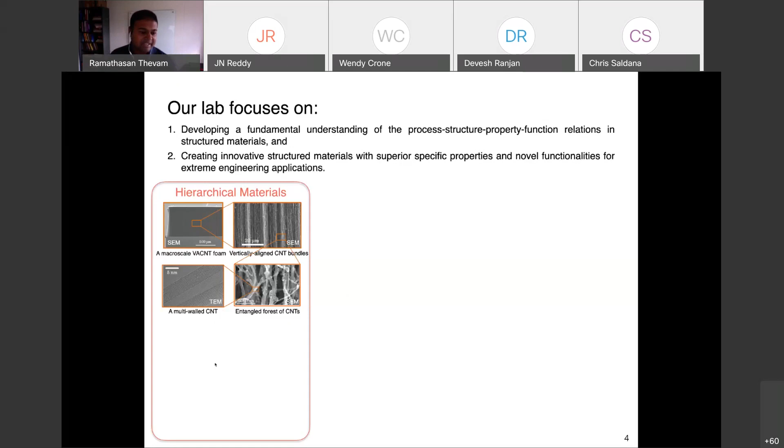Across these length scales from nanometers to macroscale, you can tune these structural features to affect the bulk properties. That's what we do in our lab, and the outcome of that is, for example, you can see in this video: if you take this material and shoot it against a target attached to a striker, it goes and deforms against the target in an orderly fashion, and it completely recovers back. During this process, it absorbs a lot of energy, in the order of more than 200 times the energy absorption of any commercial foams of similar density.

Another kind of material system we focus on is called non-Hermitian metamaterials, where these materials don't have apparent geometric symmetry, but they do have symmetries in the dynamic equations of motion, for example parity and time reversal symmetry. When these symmetries are broken, they can lead to unique bifurcations called exceptional points. Around these points, you can have extreme wave-matter interaction that we can utilize to create hypersensitive sensors and directional wave transport.

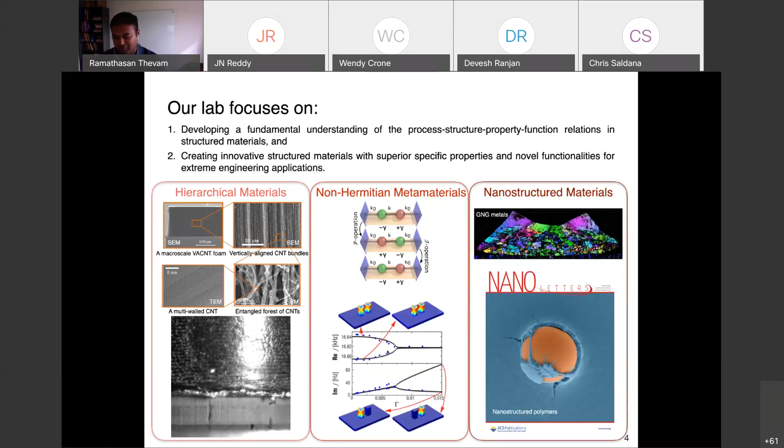The third class of system we study is nanostructured materials, which I will focus on in the talk today. So the first part, I will talk about piezoelectric polymer films. The concept of armor is an evolving concept - it depends on the threat we face in the current time. So this evolution of armors has always been accompanied by the development of novel advanced materials.

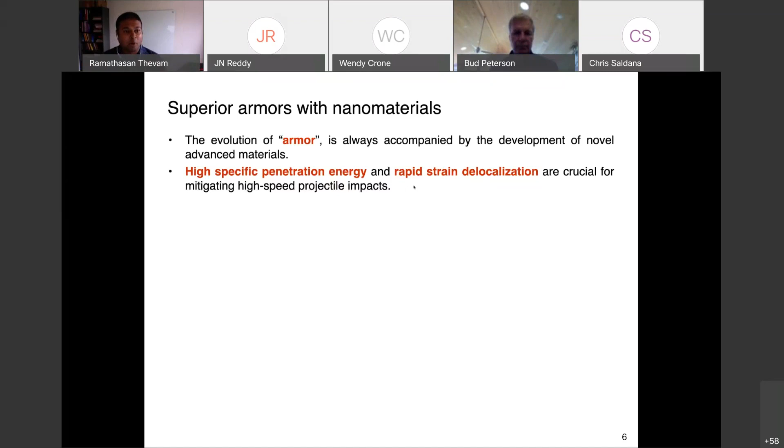In the nanomaterials regime, one of the very first studies done with this microballistic system was on graphenes. These multi-layer graphenes have been shot by microprojectiles, and it has been shown that they have superior penetration energy compared to other bulk protective materials such as Kevlar, PMMA, aluminum, steel, and also some other nanomaterials. This was the first promising result that launched us towards this nanomaterial regime, and of course we have now developed much better materials that I will show you shortly.

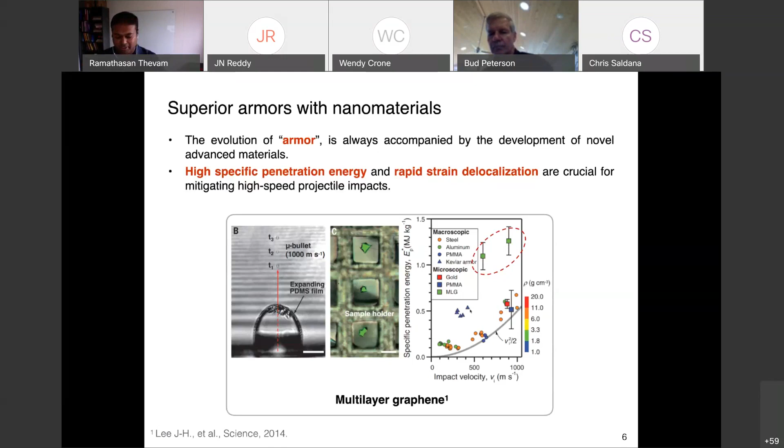This microballistic testing system performs ballistic testing at a miniaturized scale, where your projectile is a microprojectile. You have a target material deposited on a transmission electron microscope grid, and then you launch these microprojectiles selectively, one particle at a time, using lasers.

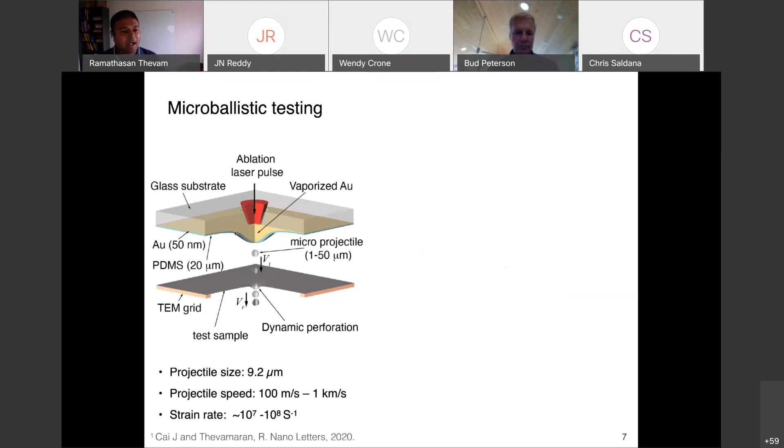The propulsion mechanism works by having a thin layer of gold on a microscope glass slide that absorbs the laser energy and becomes gold vapor. This is trapped between the PDMS rubber and the glass, such that the rubber expands and launches the projectile. This entire action happens inside the microscope, as you can see here.

While doing this, we have transverse imaging at ultra high rates, down to every 12.5 nanoseconds. We vary the projectile velocities from 100 meters per second to 1 kilometer per second, which gives a really good opportunity to study small scale materials in very high strain rate regimes.

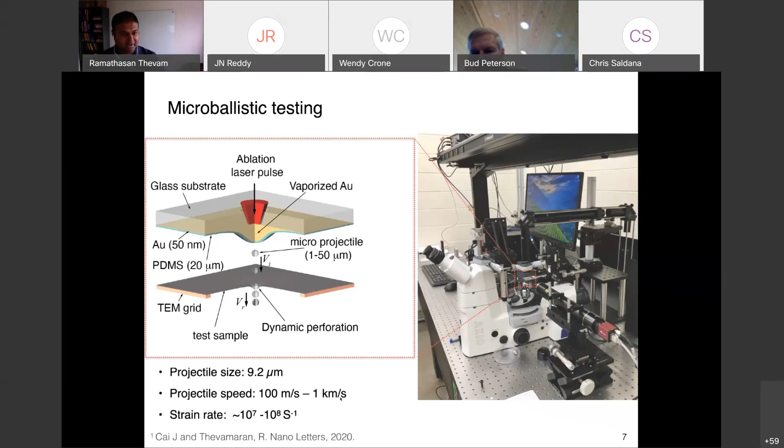Here you can see how a PDMS bubble expands to launch the projectile, and here you see a projectile penetrating a target. Post-impact, you can take the target and look at it in the microscope, where you can study the deformation holistically, looking at the entire deformation region as well as the micro and nanoscale details.

The material system we picked to study is a piezoelectric semicrystalline polymer called PVDF-TrFE. This material is rubbery at room temperature, and we did two types of processing on it.

One was reducing the thickness of the material. As you reduce thickness down to the nanoscale, the crystallinity and crystal size of the material go down because of the geometric confinement effect. In addition, we did thermal annealing above the Curie temperature, which brings back the beta phases that provide the piezoelectricity, and tends to increase the crystallinity, as you can see when you do the thermal annealing.

If you take this material and shoot microprojectiles at it at high velocity, about 1 kilometer per second impacts, the dotted line shows the projectile diameter. As you go from the annealed film to the thin film, you have decreasing crystallinity, and the strain is much more localized in the annealed film, while the deformation gets more and more delocalized as you go to thinner film.

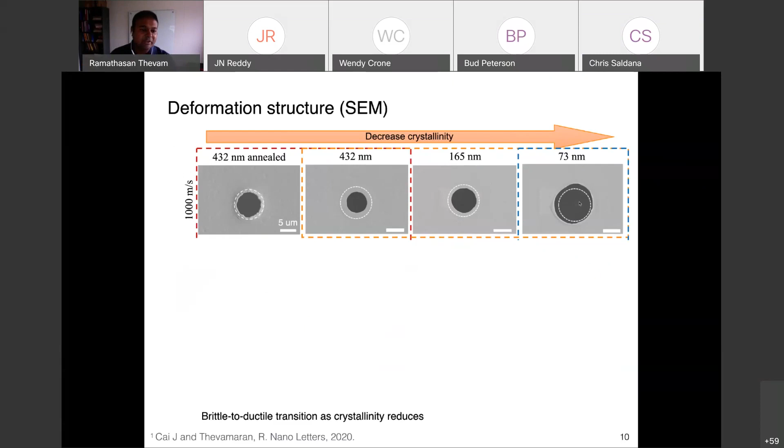As you reduce the velocity of the impact, the annealed material shows more brittle deformation. If you zoom in, you can see fibrillated crazes formed, which is characteristic of brittle deformation. But as you confine the geometry and go to nanoscale, that causes more plastic stretching and very large deformation delocalization.

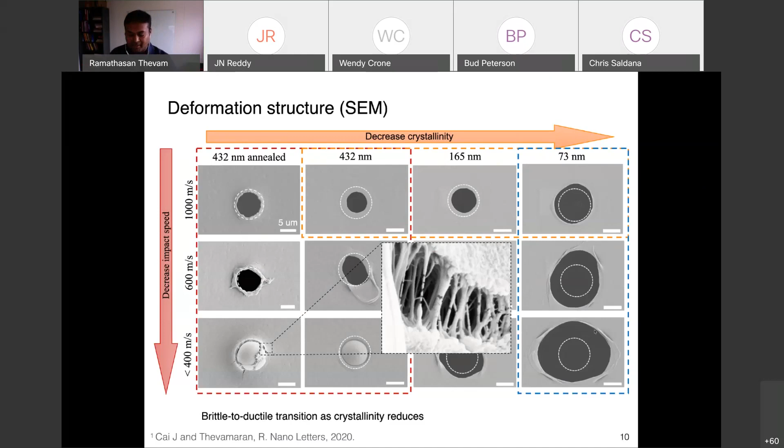So if you look at the specific penetration energy, you can immediately see that from an annealed, thicker film to the thin film, there is a very high increase in the energy absorption, or specific energy absorption.

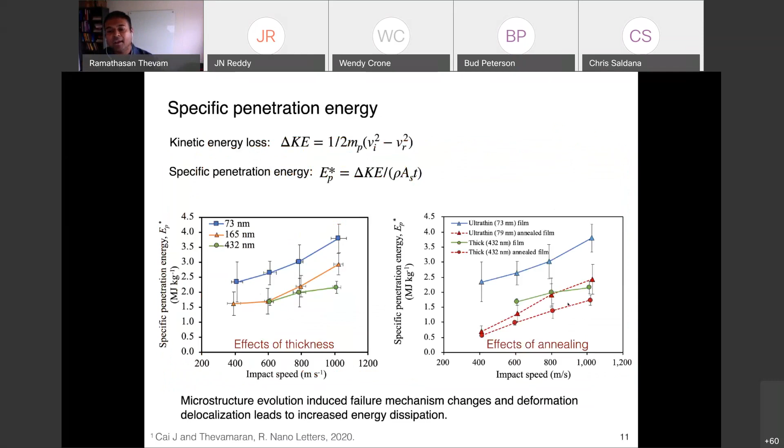If you compare to the crystallinity, increasing the crystallinity, regardless of the thickness, reduces the specific penetration energy. So why did this happen? As I said, it is the geometric confinement.

As you confine the thickness of the material, the crystalline domains have a hard time forming, so you have reduced crystallinity. Also, these crystalline domains will align more laterally in the transverse direction. In addition, the polymer chain lengths are now comparable to the thickness of the material, so the entanglement

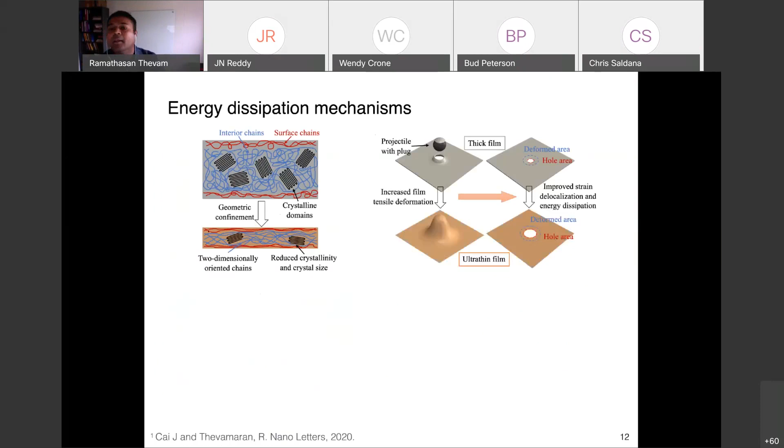morphology in the amorphous region also will change in the material. So if you shoot this is what happens: a thicker film shows more brittle behavior, while the thinner film stretches, undergoes large tensile deformation, and that leads to better energy dissipation.

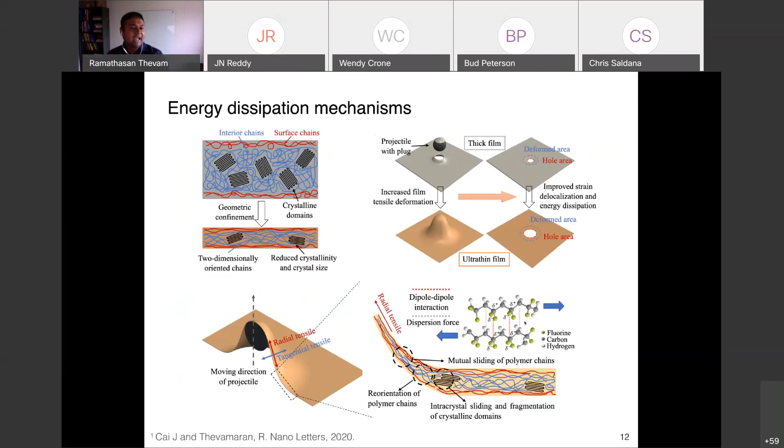As you're stretching the film biaxially by the projectile, the crystalline domains fragment, and the polymer chains get stretched and flow into the deformation region, causing more mutual sliding between the polymer chains that can also engage piezoelectric effects. All these together have led to this increased specific penetration energy.

So if you want to stop a 1 kilometer per second microprojectile, you would need about 10 layers of the thicker film versus about 19 layers of the thinner film. You can think of sequentially placing them to create an ambient armor at a standoff distance from the system you want to protect, and this system would allow you to reduce the weight by about 70% to achieve this very high specific penetration energy.

So what you have seen is a very high specific penetration energy due to polymer chain morphology changes as well as crystallinity changes, and it engages a lot of viscoelasticity and viscoplastic deformation as well as dipole interactions in the piezoelectric material.

With this understanding, we want to study more complex systems like nanofiber mats, both in polymers and in carbon nanotube type systems. We want to study the competition between the intrinsic and extrinsic mesoscale interaction effects in this material system. This is an ongoing study.

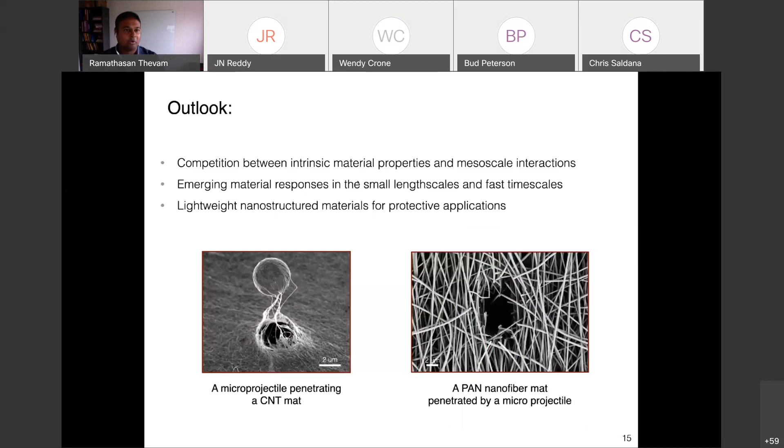The second topic I want to discuss is, instead of using this as a destructive technique as you've seen, we use it for creation. Instead of launching a rigid projectile towards a target you want to study, here you're launching a deformable projectile against a rigid target, so the projectile deforms against the target.

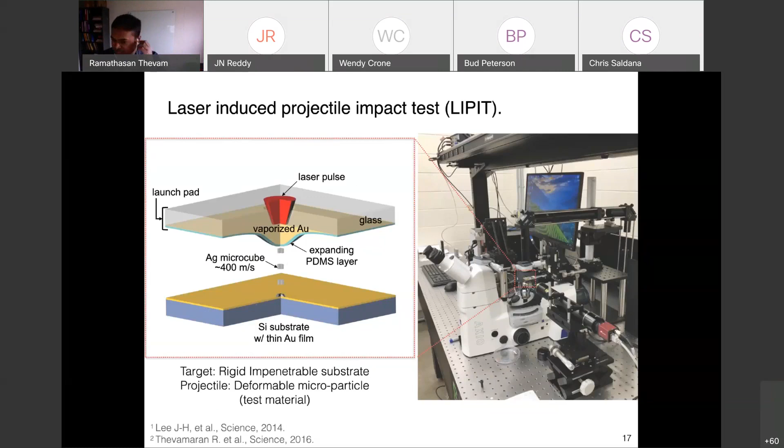So you create a structure within the projectile that we are interested in studying. Again, we use the exact same setup at Wisconsin to do these studies. This is something we have done to study a system called gradient nanograin metals.

Nanograins have been shown to increase the strength of metals, but they reduce the ductility dramatically, which can cause catastrophic failure of the material. So mixing the grains didn't improve the properties beneficially.

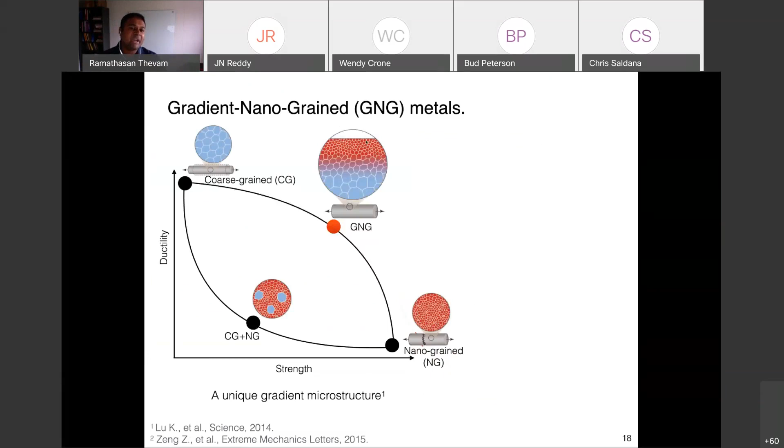But instead, if you create a spatial gradient in grain size, going from nanograins to larger grains, it can engage something called gradient plasticity, due to the grain sizes associated with the Hall-Petch relation, where the strain localizes differently in different grains. This leads to a progressive yielding situation where you can improve both strength and toughness of metals.

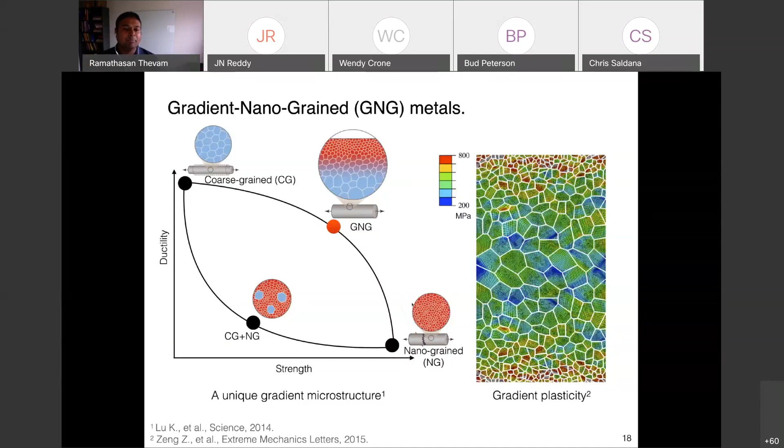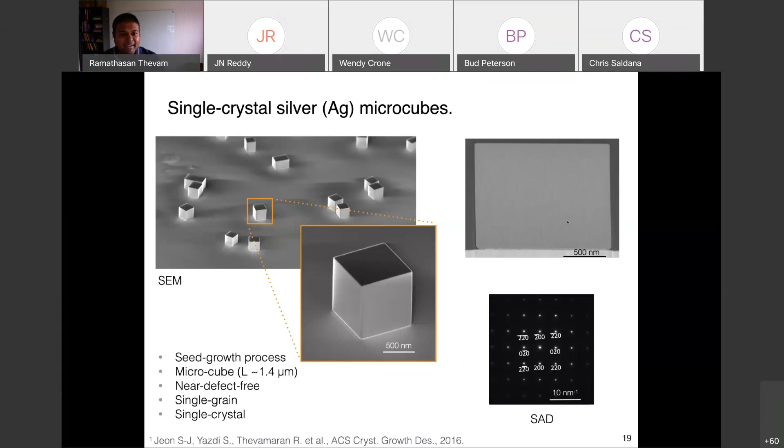This doesn't have dislocations initially, so you have to spontaneously nucleate dislocations to cause this massive strain burst in the system. So what would happen if you take these cubes and launch them against a substrate at very high velocities?

A velocity of 400 meters per second corresponds to a kinetic energy of the projectile of approximately 2.3 nanojoules. This is much, much lower than the melting energy of silver, so anything I show is a solid state process. You don't see melting, and the strain rates are very high, all the way up to 10 to the power 8 per second — very high strain rate deformation.

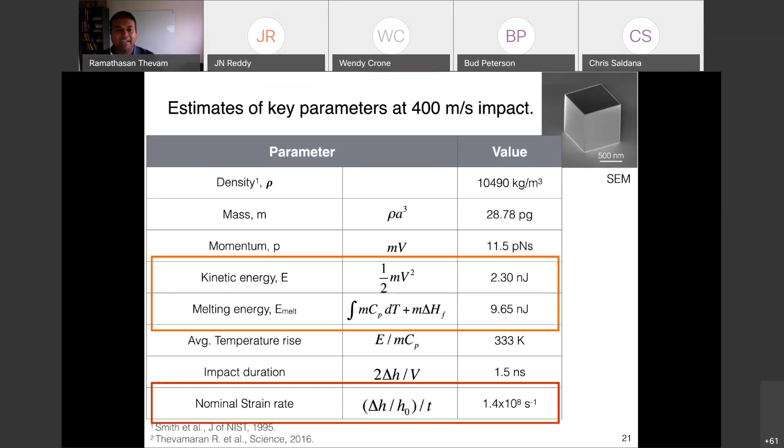This face-centered cubic material has 100, 110, and 111 symmetric directions. They correspond to this face, edge, and corner impact direction. So they create this slip system that exits the crystal, as you can see.

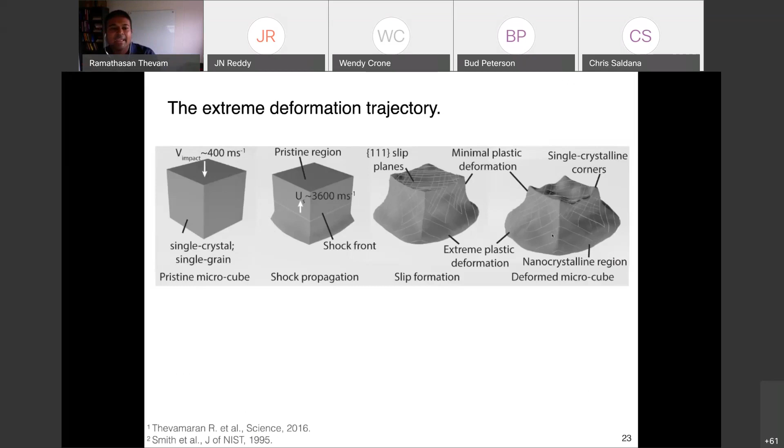If you take this cube, cut it, and look at it in the transmission electron microscope, we can study the nanostructural deformation that happened inside. What we think caused this deformation is that if you do a simple normal shock calculation, you will see that the pressure in the material goes all the way up to 10 gigapascals.

The yield strength of silver is only 60 megapascals, so this is a huge stress. That will take the material into a hydrodynamic stress state in the bottom region, which shapes the deformation of the material there.

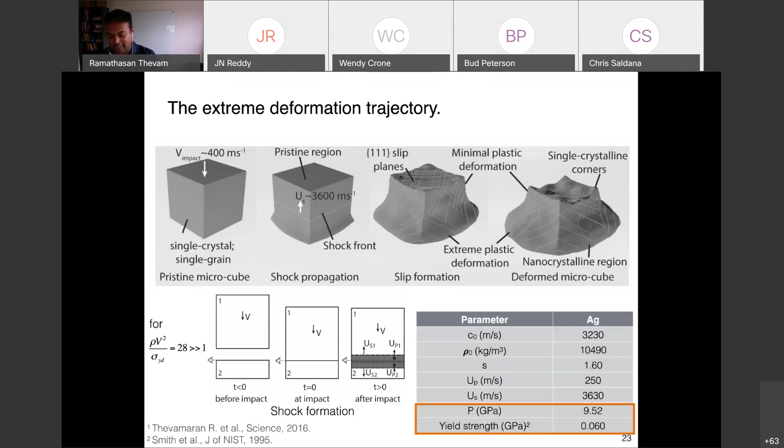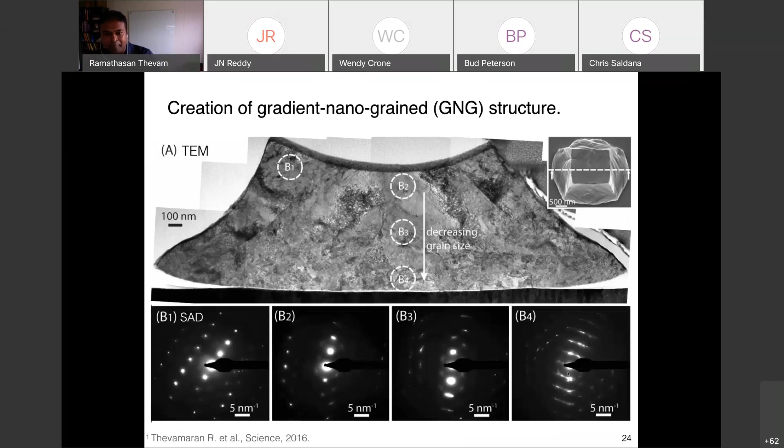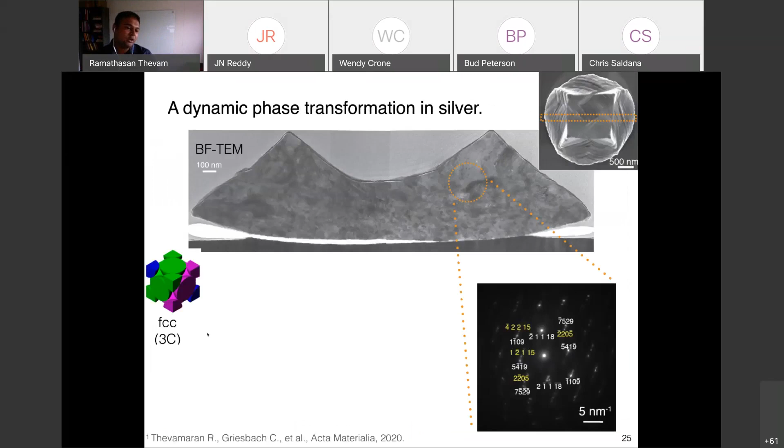If you go into more detail of this diffraction, the diffraction pattern turns out to not show this cubic symmetry anymore. Instead, the face-centered cubic silver is supposed to have this 111 plane in an ABC stacking order that repeats, which is called the 3 cubic stacking, or 3C.

But it goes into a hexagonally close-packed system instead. So there has been a martensitic phase transformation that happened in silver, taking this face-centered cubic system into a hexagonally close-packed system that has an ABCB stacking order that repeats itself.

To confirm further, we studied hundreds of selective area diffraction images and compared them against standard diffractions, and it indeed confirms that there had been a martensitic phase transformation.

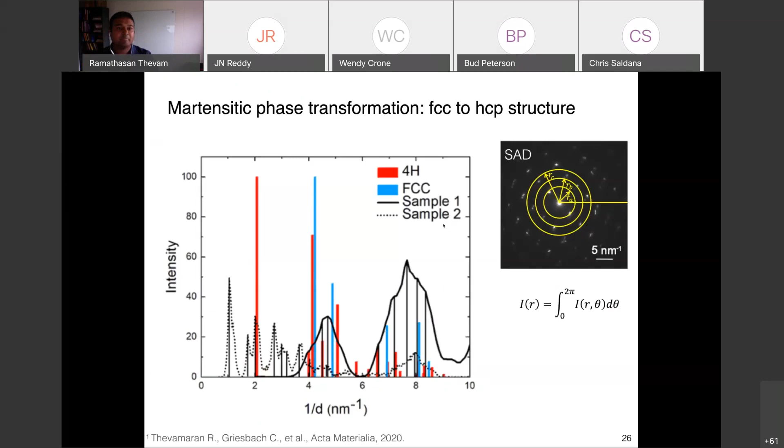Of course, we are not the first people to discover that silver has an HCP system. It was discovered in Russia in the late 1970s or 1980s in Siberian gold-silver mines, where they noticed this hexagonal silver. It has also been observed in India, forming due to high pressure magnetron sputtering, and this has also later been seen occurring in nanowires.

All these are slow kinetic processes that cause this phase transformation, whereas ours is the first evidence of a martensitic phase transformation due to a physical process of impact.

Whereas if you look at the edge impact of the cube, it does not show this phase transformation, and it tends to stay more or less single crystalline throughout the material system.

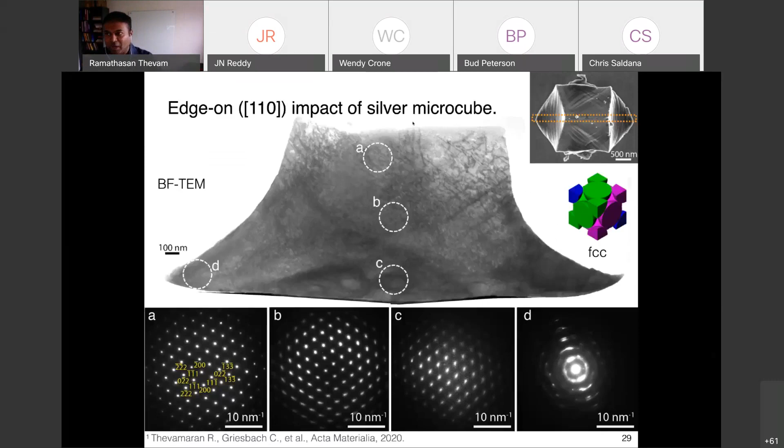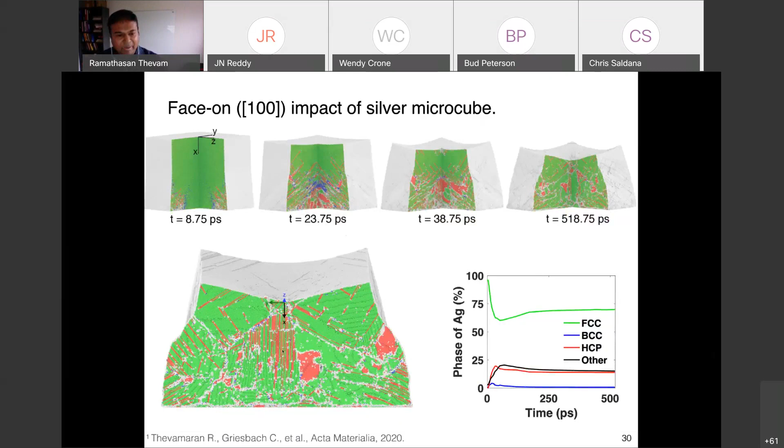To understand this further, we collaborated with Mauricio Ponga from British Columbia to do molecular dynamic simulations, which showed us the stacking faults that have been created emerge here, and then form these large hexagonal close-packed regions. Whereas this does not happen in the 110 direction of impact.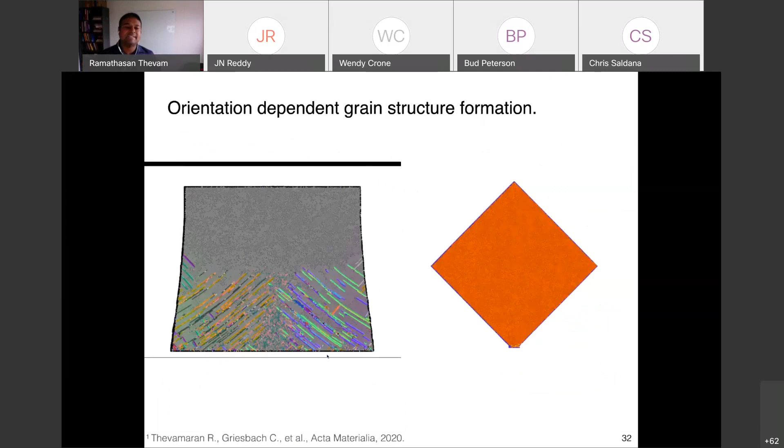If you look at the molecular dynamic simulation, it also shows that when you impact on the face, it causes this gradient nanograin structure, whereas the corner impact or the edge impact does not cause the favorable gradient nanograin structure in the system.

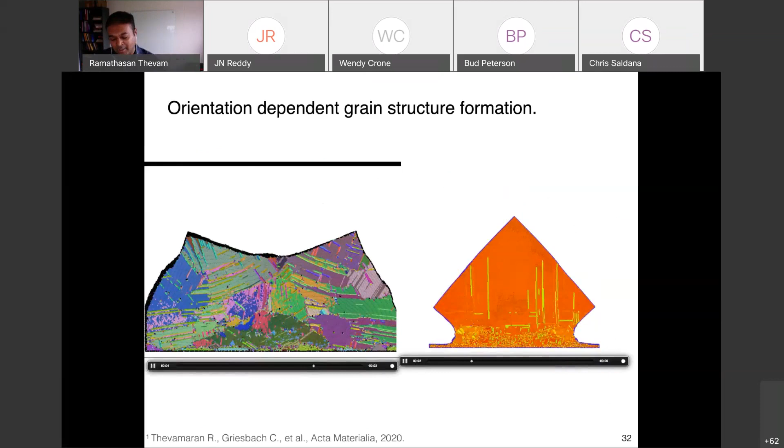So the key findings are that we do see the intrinsic and extrinsic particle shape as well as the crystal symmetries playing a role in the deformation, as well as we do see the role of two hydrodynamic and crystallographic stress states playing a role.

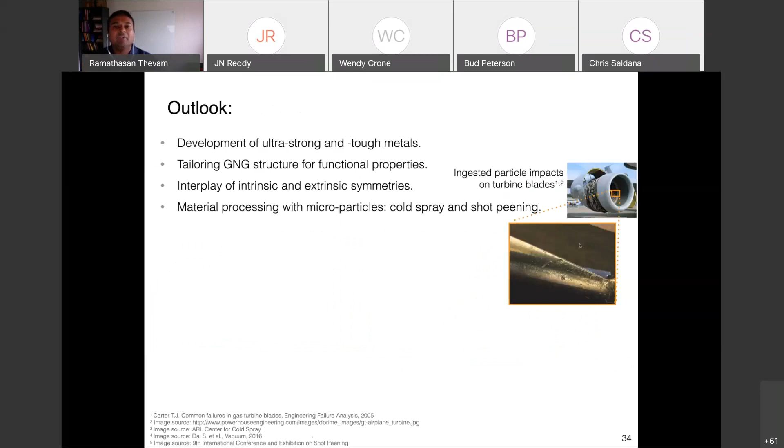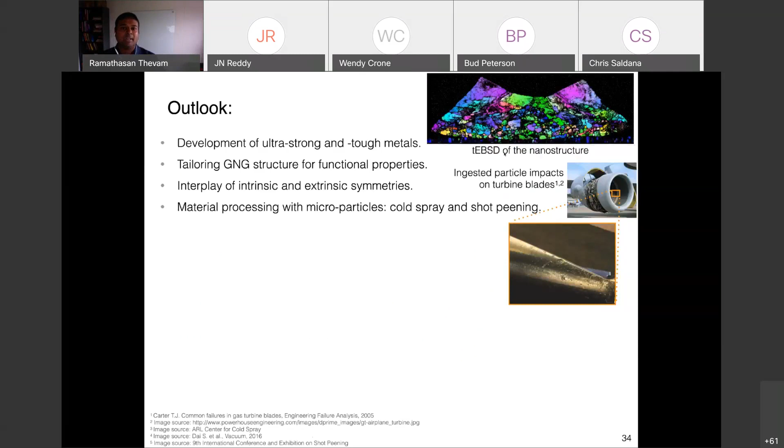So what we want to do with this is currently, with the aim of creating ultra strong and tough material for extreme application, we study the structure property relation in the material. We characterize the structure through the transmission electron backscattering and then connect them to the nano indentation properties of the material. And also this can be looked at in a material processing fashion, where you can launch these microparticles to harden a surface or else create coating.

So any understanding we develop in single particle impact in our laboratory system will allow us to improve this material processing system as well.

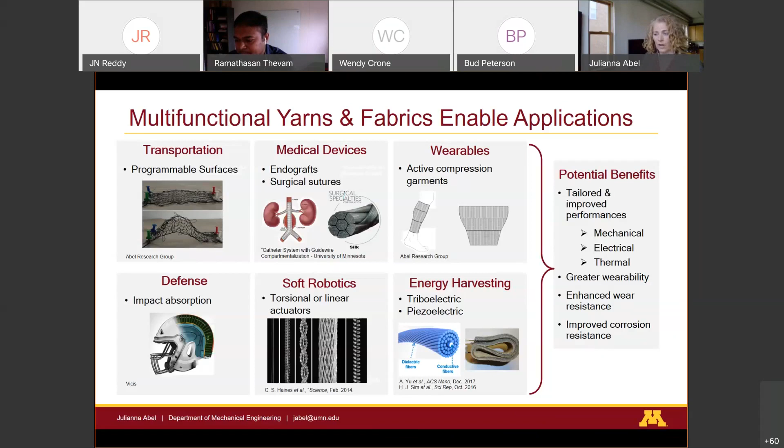We want to increase wear resistance because that's important for use, and improve corrosion resistance. And so in my lab, we look at all of these factors. My lab is the Design of Active Materials and Structures lab, and our goal is to combine innovative design processes and advanced manufacturing techniques with material and structural modeling to lay the scientific foundation necessary for the rigorous design of multifunctional fabrics.

And so we have several different projects that we're working on now, and I'm only going to highlight a few of them today. So I'm going to talk about understanding the multiscale mechanics of these structures. We're going to hear a little bit more about multiscale structures in this talk, and we're going to move on in those key takeaways and findings from these studies and how we can use them.

to implement and create new wearable technologies. And then we're looking towards new materials and manufacturing methods to move into textiles that look more realistic. And so we're looking at the manufacturing of microfibers, yarns, and textiles that have design performance.

And finally, if I have time, I'm going to share two other applications where, because of the multiscale mechanics we're developing and the design techniques, we're enabling some new applications like non-pneumatic tires and some innovative costumes. So I'm excited to share all this work with you today.

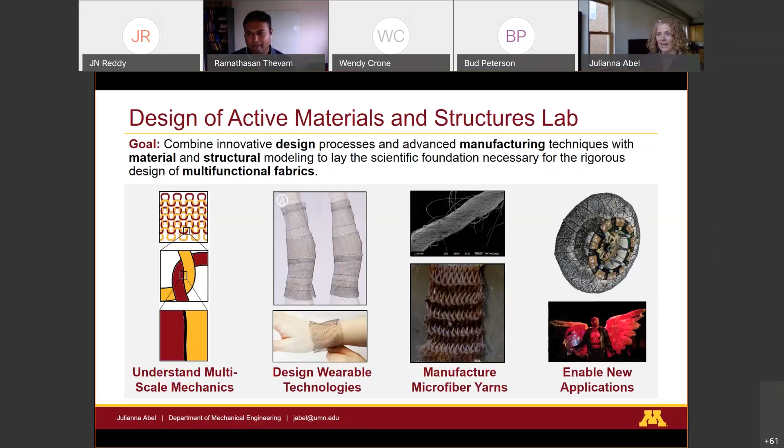But before we can dive in, we need to understand that we're mainly going to be working with the shape memory alloy system today. We work with some other materials within our lab, but this is the only one I'm going to talk about today. In order to understand how these systems work, we have to understand how the material itself works.

Many of you are probably familiar with shape memory alloys, and the most common effect is the superelastic effect. That's what's been implemented in countless implantable medical devices, where above a transition temperature you exhibit a constant stress plateau. You're linear elastic for a portion of time under loading, then you undergo this constant stress plateau, and you can recover all that deformation upon unloading. With these materials you can witness up to 8% recoverable strain, all at their high temperature above the austenite finish temperature.

Another common effect that's been used frequently is the shape memory effect. That's when you're actually changing the temperature, so instead of just dealing in stress-strain space, now you're dealing with stress, strain, and temperature. You go from a cold, flexible, martensitic state, and as you heat it up, you recover those deformations in the wire, and you can do mechanical work during this process.

There are a couple other factors and effects of shape memory alloys that we'll be on the edge of using throughout this talk. We have recovery stress generation, which is when we take a material, stretch it to a certain length, hold it there, then change its temperature and generate stress within the material, changing its stiffness. We can also exploit the two-way shape memory effect, where we have two memorized shapes that we move between through thermal transition. We're going to focus on the shape memory effect for most of the talk, with one application toward the end that involves superelasticity.

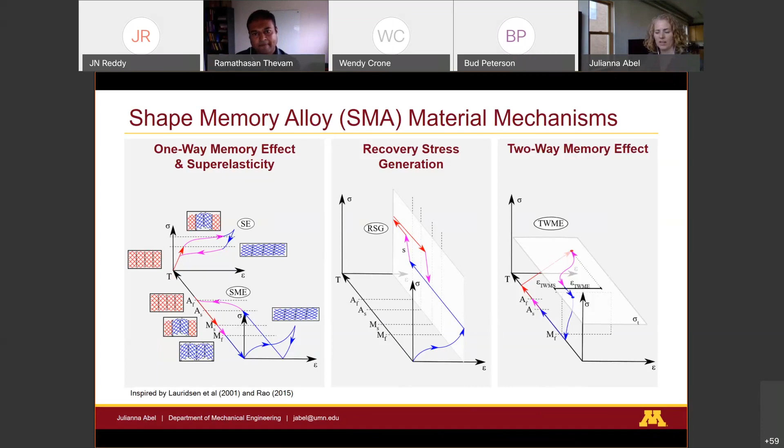Whereas woven structures are much more stiff and rigid. You have multiple fibers in parallel tows or triaxial tows, and so you get a very rigid structure.

I really like how this was shown in an article from the Jaeger group, comparing the performance of a single fiber. Regardless of what base material you're using, you have some initial fiber performance, and as you stretch the material, you'll see whatever performance is given. Once you integrate it into woven structures, you have these slight bends induced, and as you pull on it, it's a little stretchier than the base material itself. As you integrate it into a knitted structure, you have large bending deformation, so you get a much more flexible structure, and you get this J-shaped curve.

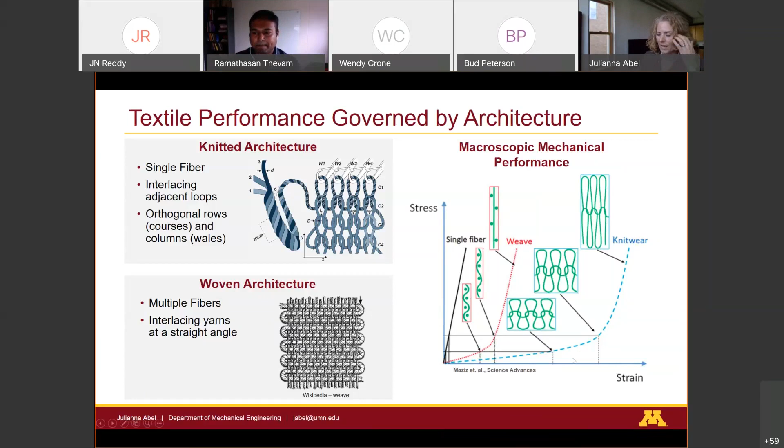This J-shaped curve is interesting for a lot of reasons. We like it because it's really close to human tissue, so you're getting a mechanical response that's getting closer and closer to what your human body exhibits, making it easier to create applications that match your body's performance.

Combining these two things together, when we have knits and weaves, we have this hierarchy of performance. At the first level, we have these bent loops, and when we make it out of shape memory alloy wire, we have this initial structure. We heat it up and get large contractions over a surface. We go up to the next level, and we can tailor our pattern.

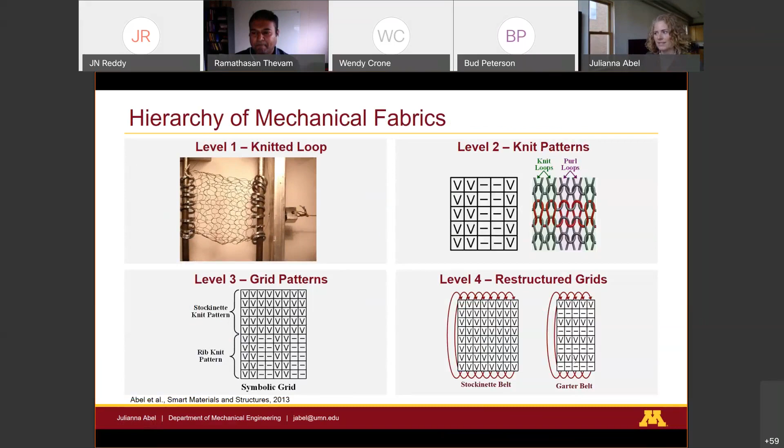So we can have knit and purl loops in certain patterns. This happens to be a rib pattern of varied columns. It's the edge of all your sweaters. And when you heat it up, it goes from a flat surface into this corrugated wavy surface.

So you can imagine using this for some type of flow control over a surface. The next level is creating heterogeneous patterns across the surface, so we have grid patterns. This is half rib and half stockinette. So the rib portion accordions in one direction, and then sequentially the stockinette comes over and folds, giving us sequential actuation with spatially distributed motions in different areas.

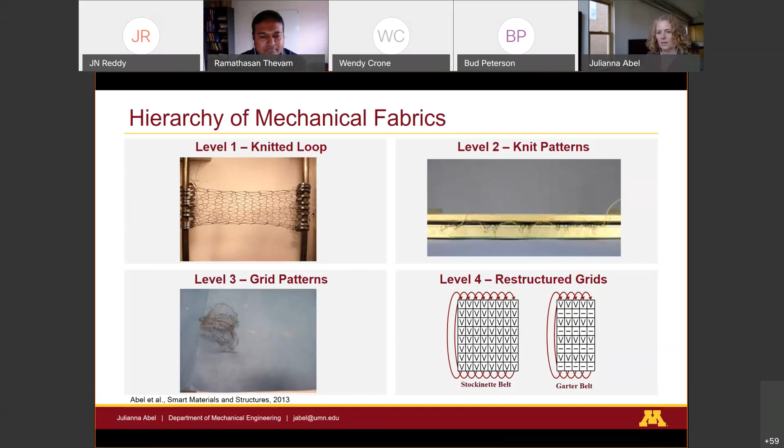And then we can create structures. We can enhance our forces or displacements by going from a 2D element into a 3D structure. This is a tube that acts as a deployable boom to produce 400% actuation strain under more than 5 times its weight. So we have a lot of potential at each of these levels to tune behavior for different applications.

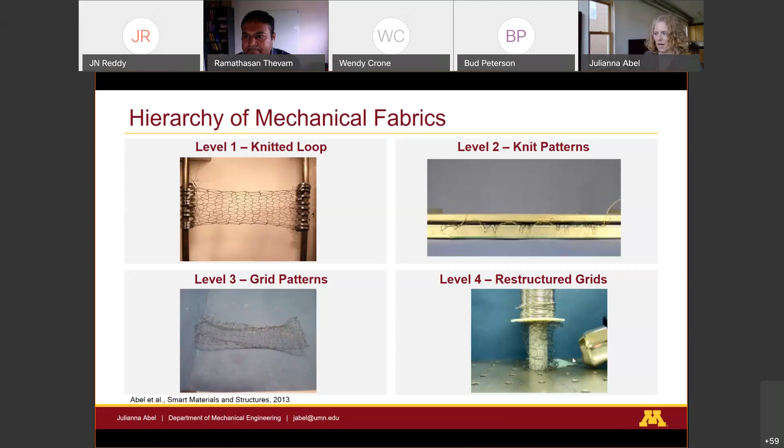This was really based off of one of the papers from my grad work, and we're going to be moving off in a whole bunch of different directions to better understand this phenomena and implement it in different systems.

So first, I want to talk about multiscale mechanics of knitted shape memory alloy actuators. This is work primarily done by my graduate student who graduated this summer, Kevin Eschen. He got his PhD this summer.

And then I'm just going to hint at one thing we did with Javier Garcia Barriocanal at UMN CharFac Center. There's so much work here, and I'm only going to show you the things necessary for you to understand throughout the rest of the presentation. I'd be happy to discuss any of these topics with you, though.

So why do we even care about the multi-scale mechanics of these structures? It's because at each scale, we have effects that determine the whole performance of the system. At the microscale, we don't know how our microscale behavior affects our design performance. At the mesoscale, we have these different loop structures and geometries that we're not sure how they impact performance. And then we have a macro scale. So how do we combine all these things together to create usable design tools?

So we're going to start up here at the macro scale because it is the easiest to conceptualize. Knitted structures are interlacing loops of adjacent unit cells, pulled through one another on a knitting machine that you see on your right. Depending on how far apart those needles are spaced and how far they pull them back, you get different loop sizes. This is a simple garter knit.

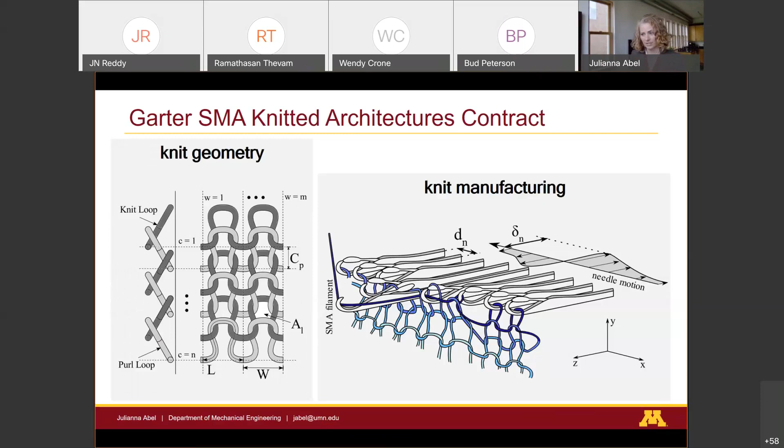It's going to provide in-plane contraction like you saw in the previous example. We're getting about 50% in-plane contraction distributed over a surface. The performance, how much it actually contracts, how much weight it pulls, is all a function of the geometry. You have a wire diameter, loop sizes, and number of loops in the course-wise or wale-wise direction. So we can tune all those parameters to get a performance for an application.

So to characterize these, we conduct constant force actuation tests where we apply a weight to a sample in a cold state. We heat it up to see where it contracts to, and then we cool it back down. We do that a couple times, increasing the applied load and cycling through.

So we can get two sets of curves, one on the left here, where we have a martensitic curve and an austenitic curve. The one on the right here is just the difference of the two, with the martensite as its reference state. So we call the one on the right actuation contraction — that's the relative contraction at any given load that this textile can produce.

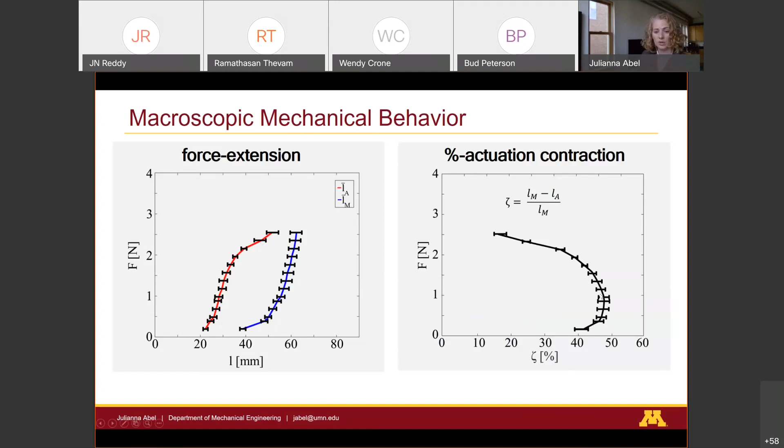And these are very small swatches, so you're seeing a peak force at 1 Newton for this given geometry. But we've done this for a lot of different samples, and we've been able to characterize and create macroscale relationships.

So we've identified this knit index parameter — it's the ratio of the area over the diameter of the wire squared, and that really governs the maximum actuation contraction we can get from a structure. We found this very useful for designing applications. You can see the different knit index: when you have a low number, it's a more densely knitted structure; the higher the number, the more open and porous that structure is. And so the more open and porous it is, the more actuation contraction you're going to get from it.

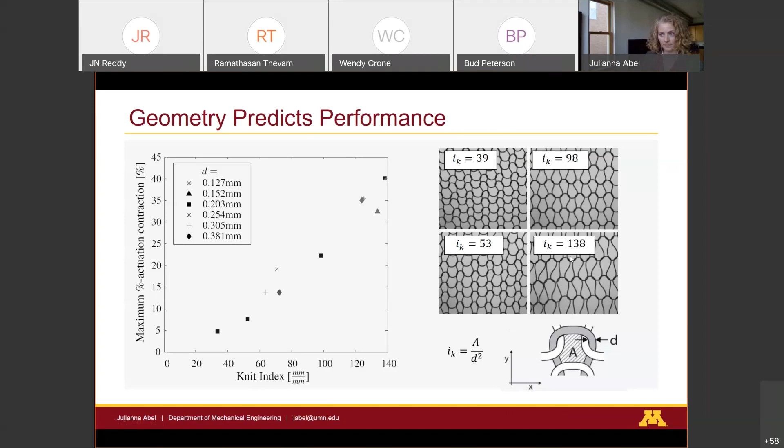And so we've gone from that macroscale relationship, and we wanted to understand the microscale mechanics. So we have a whole paper on this X-ray diffraction experiment that we did.

What we were able to do is zoom in on a single knitted loop, with a very small point of view of the X-ray. We were able to look along the length of the wire at 5 different locations, and across the diameter of the wire at several locations, and determine the austenitic phase fraction at each of those given points.

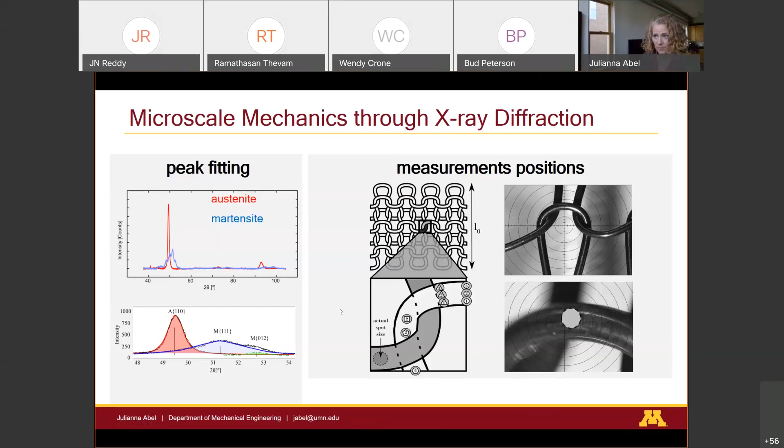So through this test, we determined that this is really a bending dominated structure. We've also developed a mesoscale modeling approach.

At the top, you see the experiments with very qualitative data. There's a lot of quantitative data in the paper, but you can see that as we go through, we have a larger austenitic-martensitic phase fraction up at the top because it has a large bending radius. Then here at the inflection point at the base of the loop of this repeating structure, we have the lowest martensitic phase fraction. So we get this distributed portion.

What was interesting is this purple dot here was unexpected to us, because we thought that due to the bending strains and how they're applied, we'd be decreasing all the way throughout the structure. However, the compression within the structure between adjacent loops increased our stress at our contact points.

This was great. We developed a model based on finite element methods that captures both the nonlinear geometry and deformations and the nonlinear material. And we see the exact same thing through this model.

So now not only are we able to predict the macroscale behavior, we're able to know the local stresses within the material. This is really important because when you're working with shape memory alloys, you want to minimize the strains, because if you go above 4 to 8% strain, you're going to get decreased repetitive performance. So now we understand the strain distribution through our material, and we can tune our architecture to achieve the performance we need.

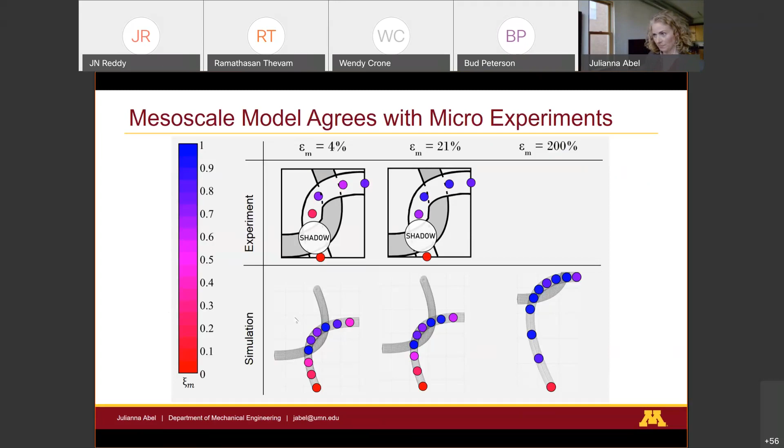And so now we're going to move on to how we're using this information. We're designing self-fitting and compression wearables.

This is really Rachel Granberry's work, and some of the projects have been done with Kevin Eschen. Rachel is an apparel design student, co-advised by me and Professor Brad Holschuh in the apparel design department.

So what is a self-fitting garment? New wearables require accurate fit. You have exoskeletons with multiple actuators within a system, but if your connection point on the body drifts over time, you're going to have reduced mechanical performance.

Likewise, you have all these wearable sensing garments hitting the market, and if your sensor isn't properly placed, you're not going to be able to reliably use the data that's being collected. You also have VR and haptics systems, so being able to convey information back to the wearer is a big emerging area of interest.

So we're looking at how we use these materials to create self-fitting garments. The concept is we'll start with something like a pair of pants that's cold, flexible in the martensitic condition, so it's easy to put on.

As you put it on, your toes poke into your legs and the garment stretches out a little bit, and we end up with a little bit of stress in that garment as we're putting it on. Once we get it fully up, it relaxes and recovers a little bit of that deformation.

Ideally, the material is tuned to operate right around your body temperature. At this point, it starts warming up, contracts, and gets smaller and tighter on the body until it reaches this point 4. Upon further contraction, it's operating in a force blocking mode.

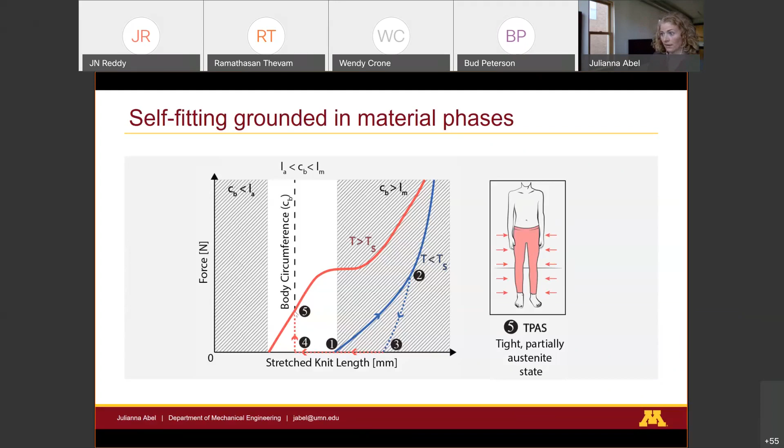In order to design one of these prototypes, we conducted an anthropometric analysis to guide the design, using Kevin's leg as an example to create this garment. On the left, you see the body dimensions in red.

That is what we want it to be when it's in the hot state, because we want this garment to perfectly fit the body. In blue, we have the size necessary to properly don the garment, so you can pull it over your ankle. On the right, you see the pattern making approach and the different knit indices needed throughout the garment to achieve the percent contraction.

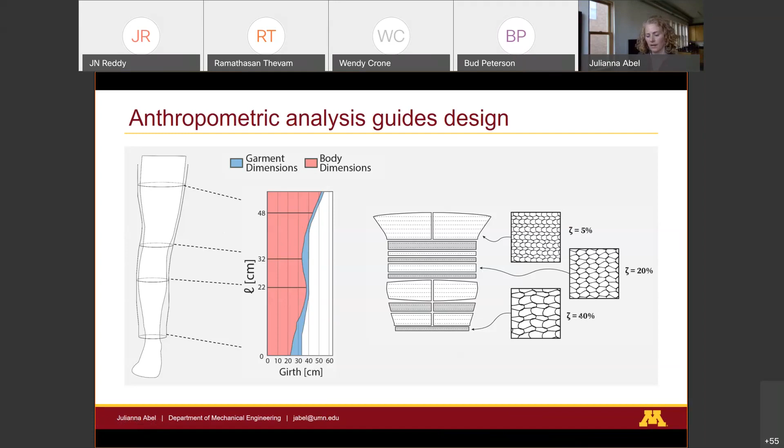So we actually created this garment. On the left you can see stills of it, and on the right it's made with Dynalloy Flexinol 70-degree C wire. It's being heated with two heat guns, and you can see as it's heated, it shrinks and perfectly conforms to this plaster cast leg.

We were able to quantitatively assess this contraction through image tracking using our Correlated Solutions Vic-3D system. In gray is the bare leg, red represents the contracted form of the garment, and blue is the donned form, or the stretchy, flexible, cold form. The red and black lines match very well, so we're getting consistent performance and contraction over the course of the body on the macro scale.

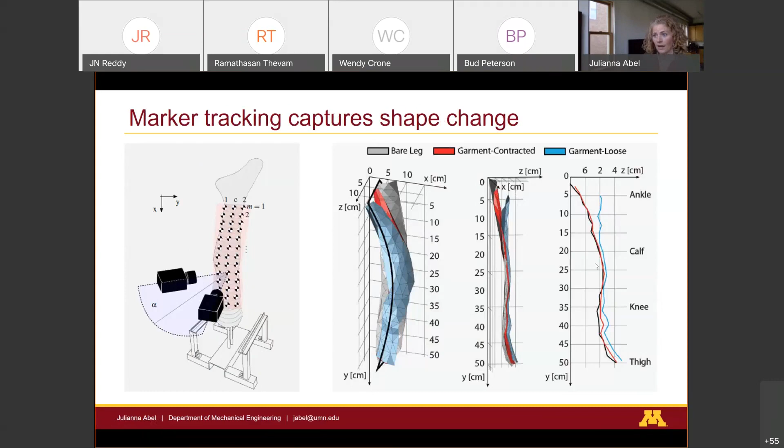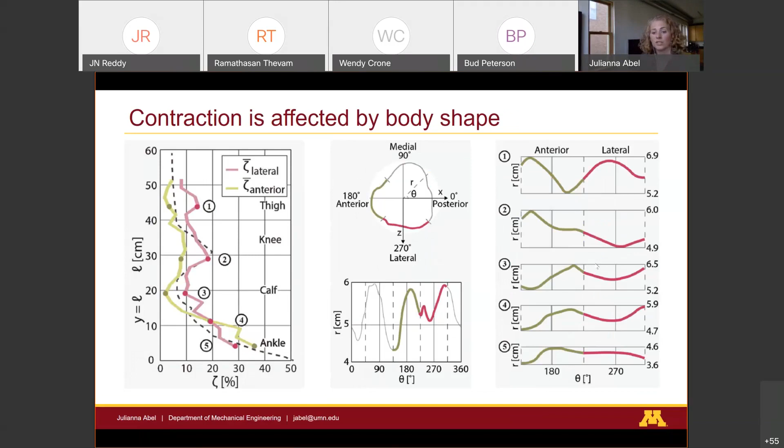However, when we look at distribution around the form, we're seeing issues with topography. Human topography greatly affects the performance. So if you have a concave region, we were seeing that the garment would just bridge the concave portions and not actually fit the body in those areas.

We were able to use those structures I mentioned earlier, where we get different bending motions in different directions, to create a functionally graded garment that would perfectly conform to the geometry of the leg. Through that process, we went from low contraction numbers up to very high contraction, having 86% contact around the surface of the leg.

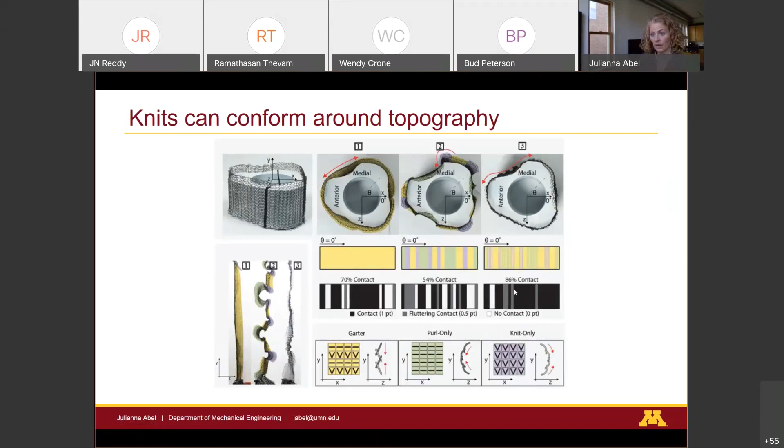But what we really want is to operate these on the human body, and using that Dynalloy material that requires a heat gun isn't feasible on the human body. So we worked with Fort Wayne Metals to get a material that worked for us.

This material, instead of having the very high transformation austenite finish temperature of 76 degrees we saw on the wire, the NiTi number 4 we got from Fort Wayne Metals had an austenite transformation temperature of 36.5 degrees. That's within a safe realm to operate on the body, since you can go up to maybe 45 degrees without causing burns.

We're really excited to have access to this material so we can demonstrate it on the body. We only had a small amount, so we made a wrist garment, a self-fitting wrist sleeve, using the topography of the wrist for a custom design pattern. When we pulled it over, it followed a similar qualitative performance: initially it's flexible, you stretch it on over your wrist and hand where it's larger, and once it's on the wrist, it relaxes, the body heats it up, and it starts to apply pressure.

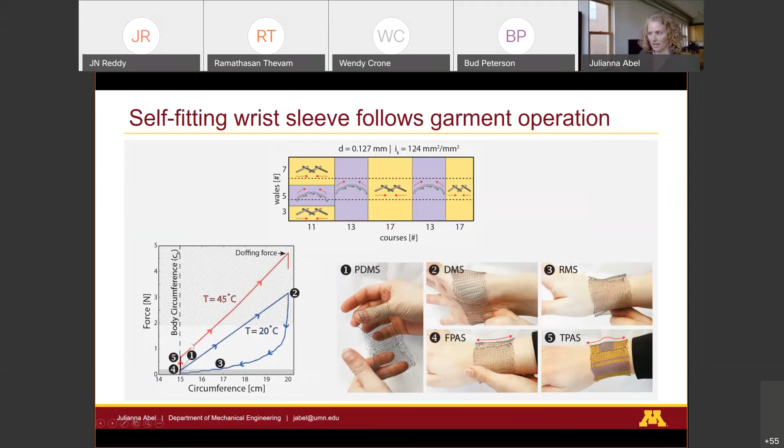So we're really excited for this, but what's next? We also want to go from creating those low levels of compression of 15 millimeters mercury to medical grade compression. There are numerous medical conditions that rely on on-body compression, such as orthostatic intolerance, hypertension, and DVT, that would benefit from enhanced compression garments and enhanced compliance of wearing them.

And below, you see our first on-body prototype that we shared at the SMASIS conference this summer.

So it's great, but you saw in that last image, the knitted area is not what we think of as a fabric. It was very much a textile, an open porous textile.

And so we're looking to the next generation of these and how do we make these more wearable. One way is to look at how we manufacture NiTi spun microfilament yarns. This is done in collaboration with a group from Fort Wayne Metals who are producing this material.

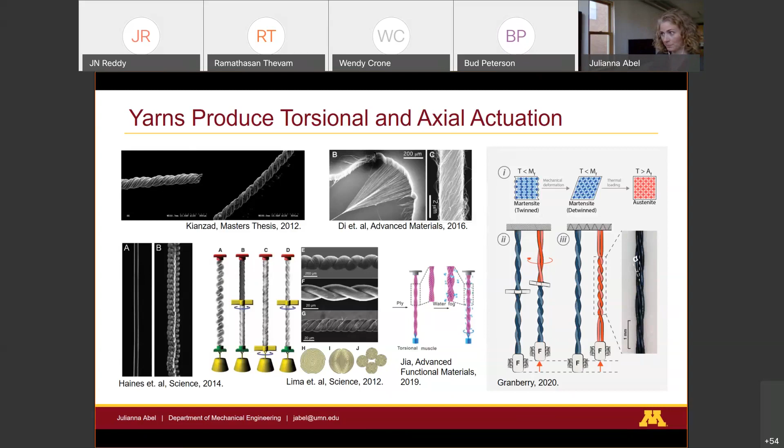We really want to understand this coupling between the material that we're using, the geometry of the yarn, and the manufacturing parameters. It's a really well-established relationship that our manufacturing twist, our linear density, and our packing density all rely on these manufacturing parameters that we see in our system.

So we're using a traditional ring spinning technique to create these, where we have a bunch of parallel fibers that come into our system. They're all twisted together, and depending on our delivery speed and our spindle speed, we get different amounts of twist.

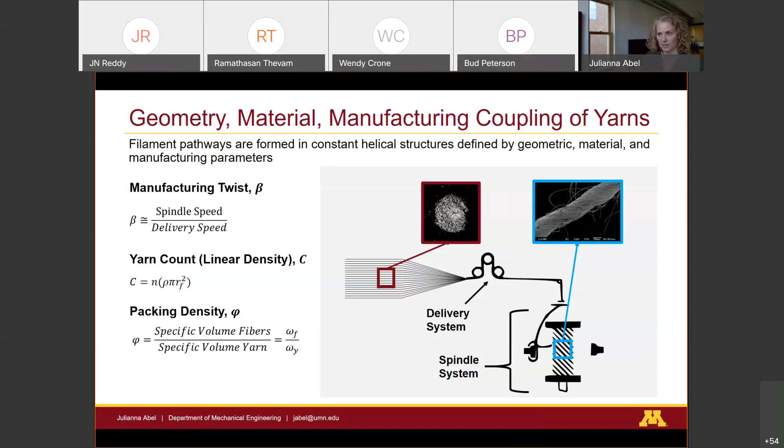Also, because we're applying twist, we have different fibers in different regions. We have the center fiber that's straight, acting as just a linear actuator, and then we have these torsional or helically twisted fibers around the outer edge. So we have a really complex interior stress profile, and we're trying to understand that relationship of where we are in the structure, how we apply twist to get a desired macroscopic performance.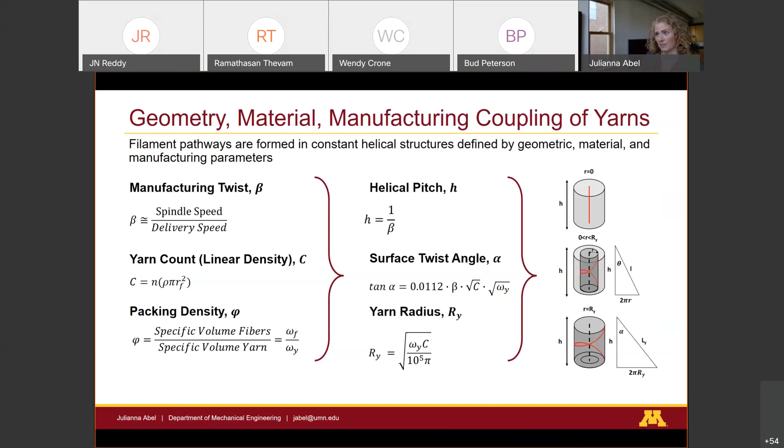So how are we making these? We're getting these bundles of filaments from Fort Wayne Metals. We've gotten things between 5 and 10 microns, and bundles between 400 and 1,000 different bundles, and they etch away the iron matrix that they draw them in, and then we bring them in and do some thermal processing within the lab in order to stabilize our transition temperatures and twist set or stress relieve the yarns.

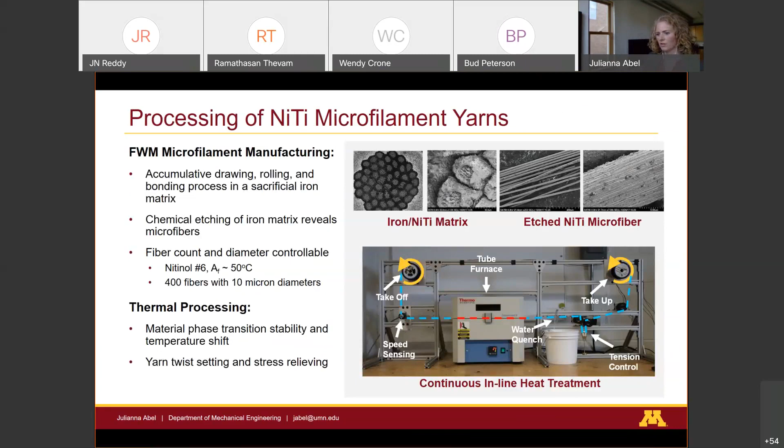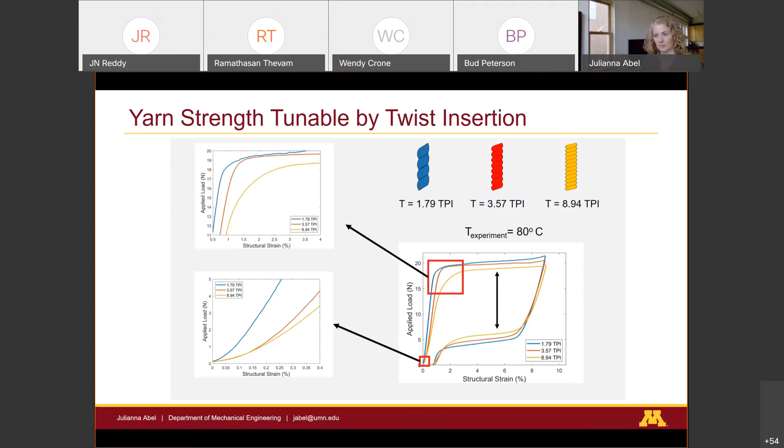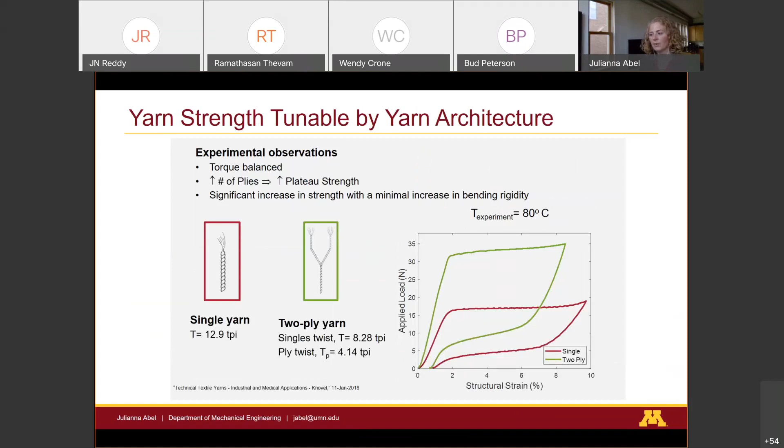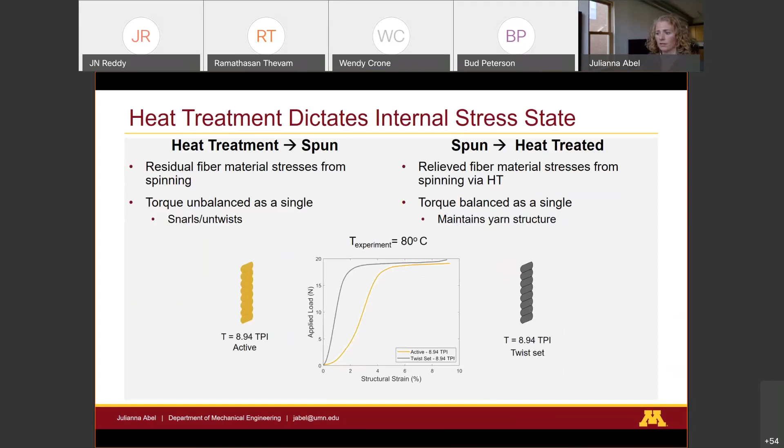And so through this heat treatment process is another knob that we can tune to create the mechanical performance that we want.

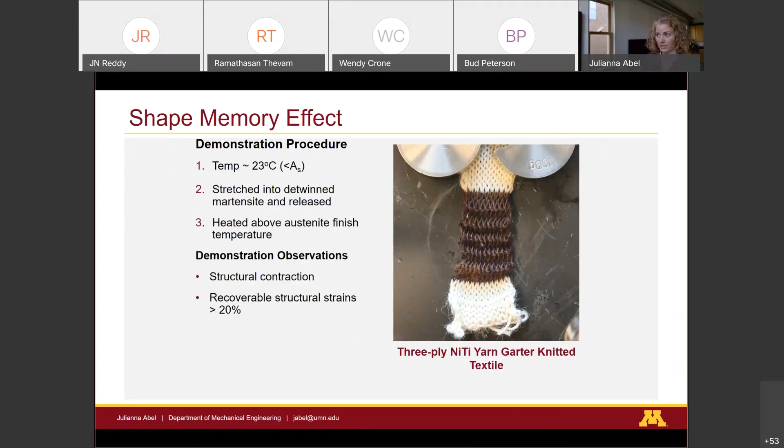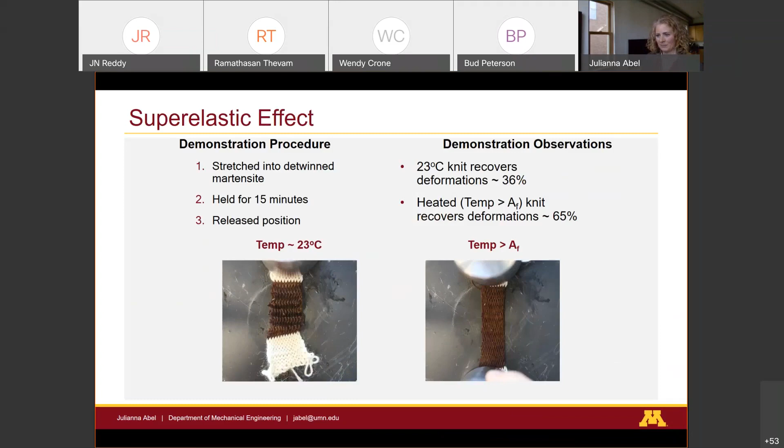So just two last really quick applications, emerging applications. These are both applications that Henry Kuhn, who's a graduate student in my lab, has worked on. One of them is done with Santo Padula from NASA Glenn Research Center, and the other is done in collaboration with Denny O'Malley. So the first one is rover tires.

There's a big issue with rubber tires failing due to their non-compliance. NASA Glenn has a spring tire that's made out of nitinol that they're investigating right now. And we think knitted structures would provide a great next generation application for these materials. And so we have a non-pneumatic tire. It has some very simple components: a wheeled hub that's not optimized, a rim. It includes superelastic radial elements to carry the weight of the vehicle, and a superelastic knitted tire tread.

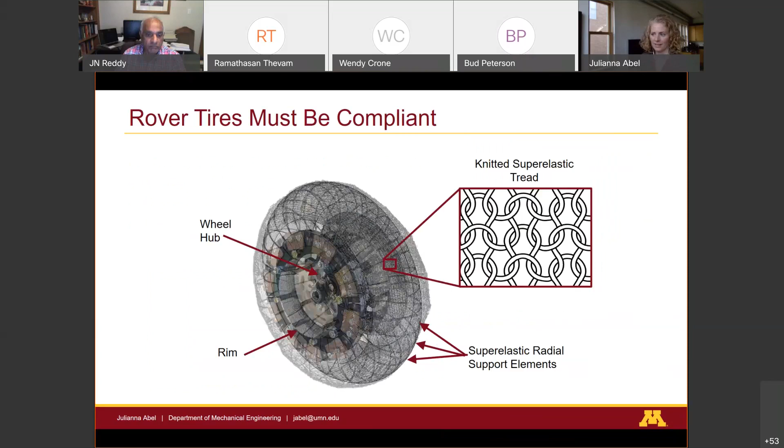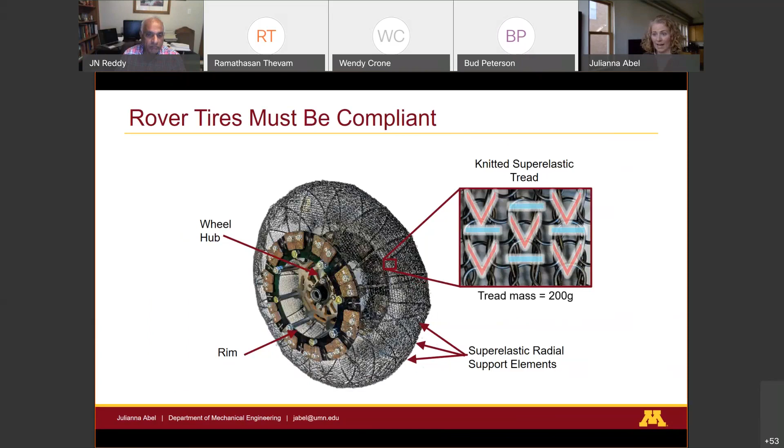And so here's what it looks like. It's a very densely knitted structure where we're leveraging shape setting of the material and the pattern to create better traction. And you can see it going over a very large object. It envelops this sharp, awkward shaped object. It would not pop the tire.

This tire can support 50 pounds as designed. And you see as it rolls off, because of how it's designed, it pops back out and it's completely reusable. So it's very useful for rough terrain.

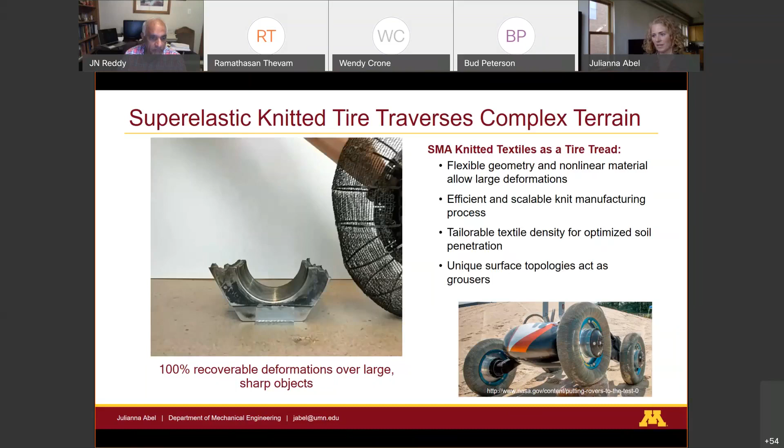And the last one I want to share with you is engaging communities with STEM. And so we're talking about all these different techniques and approaches to create multifunctional yarns and textiles. And it seems really abstract, some of the applications, but it's great to reach out to the public and get them engaged. And so we were able to do this collaboration with the Department of Theater, Arts, and Dance recently.

And we created a linkage-based frame and used shape memory alloy coils to create robotic angel wings for this play. And they were actually worn on stage multiple nights. And she's wearing a leather jacket that has a battery pack in the back, and she has a button in her sleeve. And whenever she wanted to in the play, she just pressed the button on her wrist and the wings came up. And they were very robust.

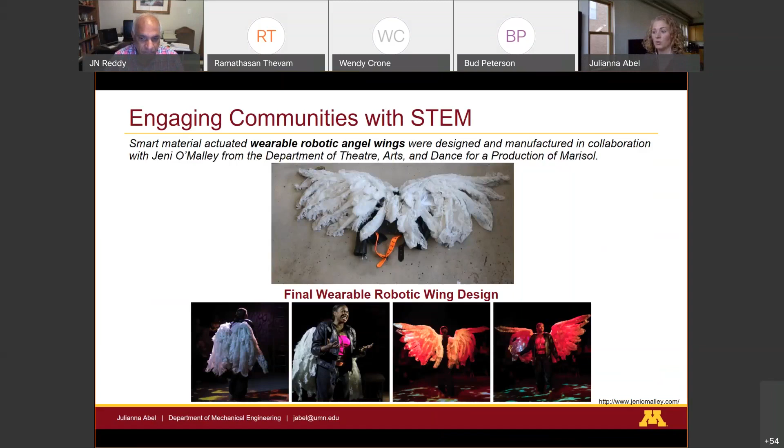She climbed scaffolding, and it was really fun being in the crowd watching it, because there were some young kids in front that were just amazed by the wings, and they were trying to talk, because we had a small blurb in the program, and they were learning about the material. So while it's not the most challenging application, there's just so much potential to engage new students with these types of applications.

So I want to acknowledge all my collaborators and my students. My students work really hard. And we've had a lot of graduate students work on these projects and undergrads. And again, like the speaker before, these are all older pictures. Unfortunately, several of these students are not shown because we haven't had a get together recently. But yes, thank you. I'm happy to take questions now.

You did excellent in terms of being on time.

So let's see, there are some questions. The question is about how do you model, I think this is to Julianna, the point of contact between two fibers. You understood the question, right? How do you model the point of contact between two fibers?

We are using a sliding contact model to capture this. We're looking at interference and moving nodes, and we have a very traditional and rudimentary approach to doing friction between two loops. We're only modeling friction between two contact points right now for the monofilament structures. For the multifilament structures, we have a model that we've developed that looks at and models contact as hydrostatic compression within the yarn itself. Okay, very good.